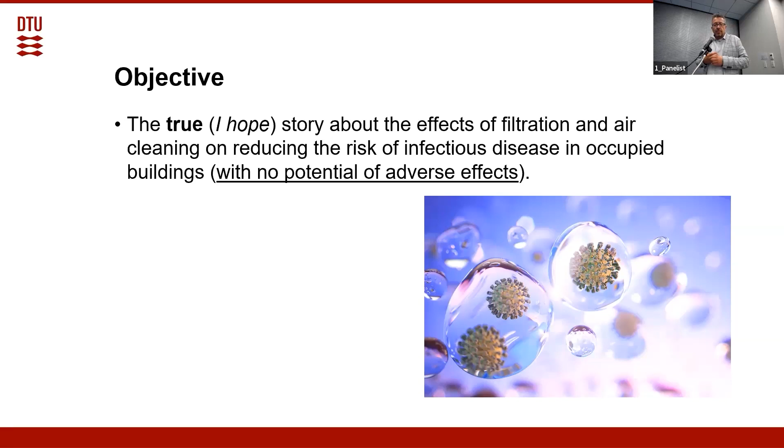But think about the normal consumer at the very end. Mr. or Mrs. Smith is afraid of COVID and they want to buy an air cleaner and they really don't know what to do. So my objective today is to tell the true story, I hope true, we can discuss afterwards, about the effects of filtration and air cleaning on reducing the risk of infectious disease in occupied buildings, with no potential of adverse effects. So I will be looking at different types of air cleaners that may or may not create potential adverse effects on people.

So let's start with the introduction. During the pandemic, there have been several recommendations regarding air cleaning, and these two are probably the most known. One is by the ASHRAE Epidemic Task Force core recommendations, which say under point 2 that besides providing ventilation, you should use combinations of filters and air cleaners that achieve at least MERV 13 or better levels of performance for air recirculated by HVAC systems. They also say only use air cleaners for which evidence of effectiveness and safety is clear.

And then the Lancet COVID-19 Commission Task Force also published recommendations, four of them, and two related to air cleaning. One was a repetition of the ASHRAE Epidemic Task Force: upgrade air filters to minimum efficiency reporting value MERV 13, and then supplement those with portable air cleaners where needed. So these were basically the recommendations.

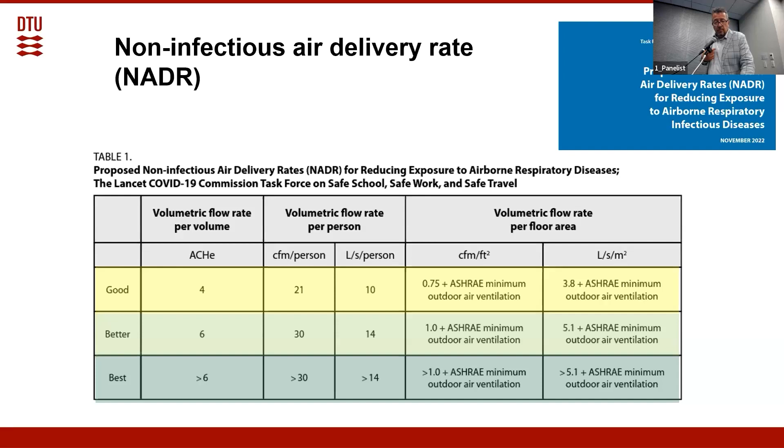And recently, last week on May 12th, ASHRAE published for review ASHRAE Standard 241, in which those equivalent clean air delivery rates were proposed. At the same time, CDC published recommendations for 5 air changes per hour. I'm talking about filtration, but it is very important to have that reference because these are the target levels of dilution that you need to obtain.

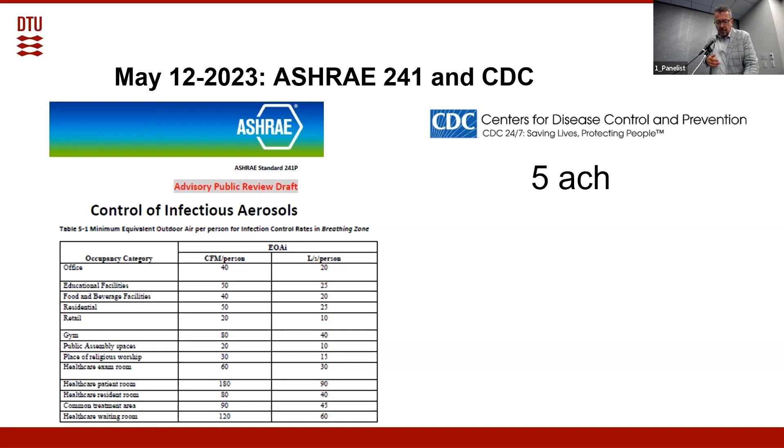So if we think about those target levels, we have to remember that those target levels refer to the aerosol transmission in long range. So what we are talking about is a long range, not the short range. So it's a far field, not a close field. And these are the aerosol transmission. So if we talk about 5 air changes per hour, we're talking about reducing the risk of aerosol transmission in the far field.

This dilution will reduce the concentration of aerosol in a short range or a close field, but we really don't know and cannot estimate whether that will have any effect on reducing the risk. It will also depend on the air distribution in space and so on. Because basically, in a space, the loss rate of the virus or aerosol that contains the pathogen will be obtained by generally 3 methods: by dilution, that occurs by the outdoor air, by natural virus inactivation, Chris was talking about it, I just repeated, and the deposition.

So this 5 or 6 air changes per hour is basically additional to other loss rates, such as deposition or natural inactivation. And instead of using only outdoor air, because we are talking about aerosol, what we can do is replace part of the outdoor air with air cleaning methods. That will reduce the level of aerosols, so dilute them, or remove them from the space, or inactivate the virus. And this inactivation level would be corresponding to certain loss rate of the virus in the space.

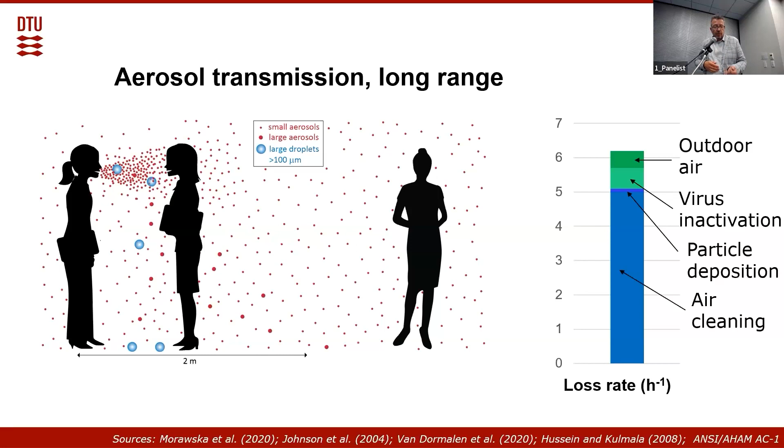So this is why air cleaners are important in that sense, because we are talking about the pathogen and aerosols. And removing it or reducing the risk does not necessarily require only outdoor air to be used for that purpose. So to repeat, what the air cleaner does is increase the dilution rate. So it's an additional loss rate or dilution removal element in a space.

So if we have a mass balance model, we have an emission side, and then we have a dilution or removal side. When we have an air cleaner in a space or in a recirculation duct, we will have an additional term, and this additional term is on the dilution part. So this is the general theory. And of course, increasing loss rate, as is seen on the right figure, will reduce the probability of infection. So if we can document that the air cleaner is contributing to the loss rate of the virus, we will then reduce the probability of infection.

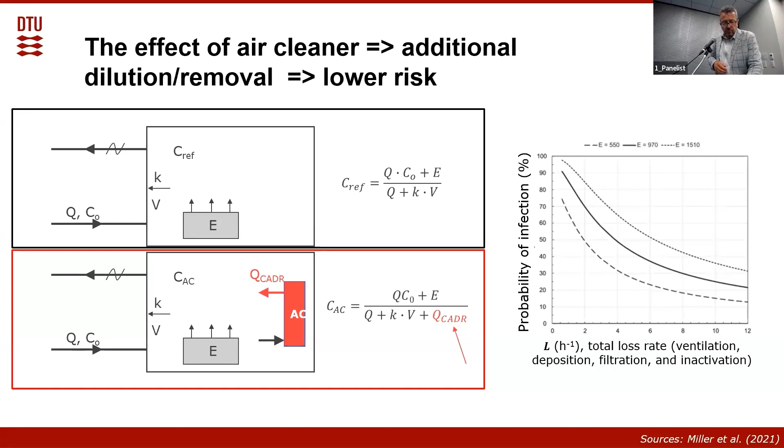If we speak about air cleaning technologies in connection to infection control and controlling the risk of infection, we can talk about two types of air cleaning technologies. One, technologies that I would call subtractive technologies, that remove the virus from the space, and then other technologies that I would call additive technologies, that add some constituents to the space to remove the aerosol or inactivate the virus in a space. So basically subtractive and additive.

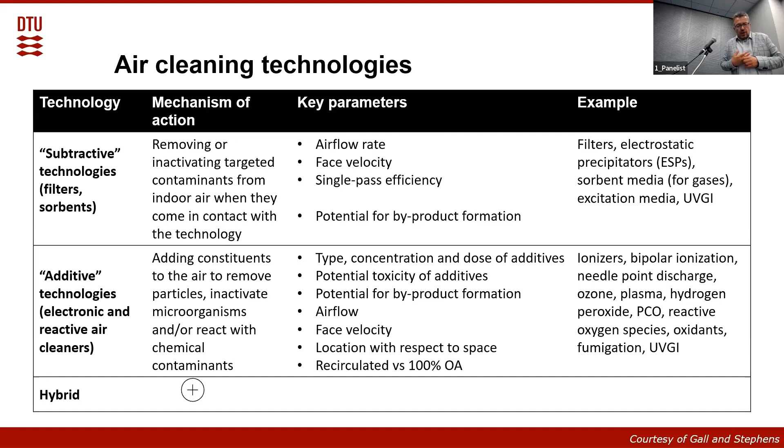As examples of subtractive technology, we can have filters, particle filters, electrostatic precipitators, sorbents. From time to time, UVGI or UVC is also considered that, although I would rather call it an additive technology. And additive technologies would be the technologies that use ionizers, bipolar ionization, needle point discharge, ozone, plasma, hydrogen peroxide. They add an element to the air in order to achieve the air cleaning effect.

For the subtractive technologies, which is filters and sorbents, there is a good deal of standards that define their efficiency. Particularly for particle filters, we can estimate their efficiency, there is a good deal of standards to which we can refer, and we can test how effective they are. We also have some standards regarding sorbents, but basically these are standards that refer to the material that is used in the sorbent. Also, we have standards for the UVGI.

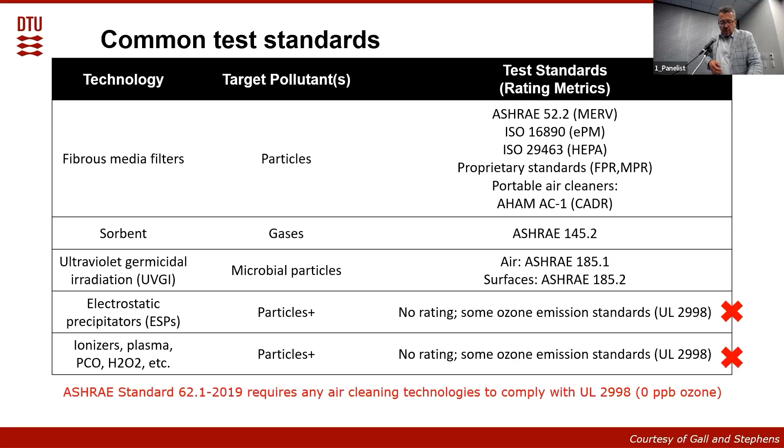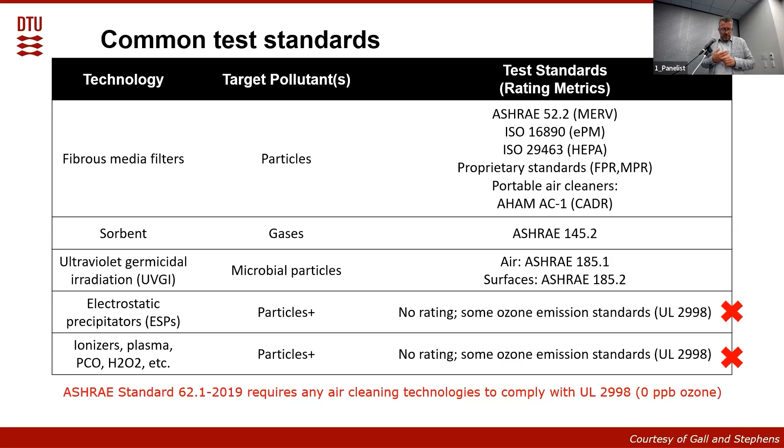However, we have less information about other types of technologies and other standards, and particularly that applies to ionizers, plasma, and so on. There are no standards which we can use and refer to, and there's no rating. And some of them emit ozone, and basically we can refer to UL 2998, which defines that air technologies, according to 62.1, should comply with that. So they should actually emit 0 ppb ozone if we follow that recommendation of Standard 62.1.

There are other recommendations, though, regarding air cleaners. Although there are no standards, there are certain position documents and recommendations, and our epidemic task force also had it as a recommendation: what type of air cleaning technologies can be used, and if they are used, what procedures they should comply with. These are the two positions from the position document on filtration and air cleaning published by ASHRAE in 2015, and the new version will be coming later this year or early next year. Those two specific positions will be retained in the new version.

So if we think about air cleaners in connection with infection control, we should remember that all filtration and air cleaning technologies should be accompanied by data documenting their performance regarding removal of contaminants, established on industry test standards. Very often these are not available for some of the technologies I mentioned, so there must be scientifically controlled third-party evaluation and documentation that they are working. They cannot just be claims; they should be documented. But even this documentation may have problems; I'll come back to this in a moment. And devices that use reactivity of ozone for the purpose of cleaning the air should not be used in occupied spaces.

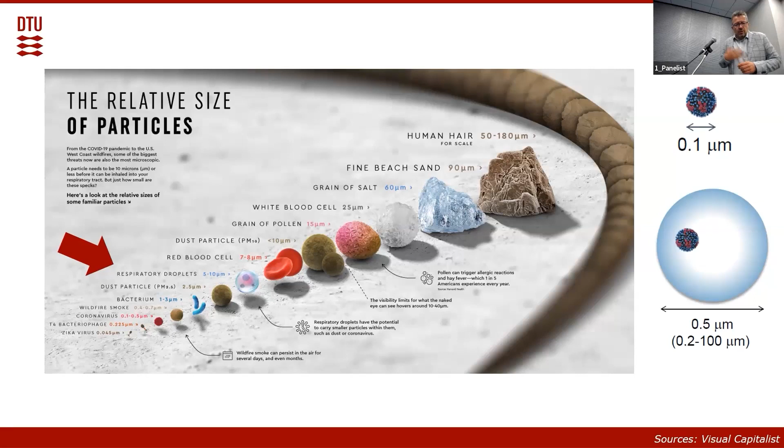So let's start with air filtration. There's not much to say. Every one of us knows the virus has a certain size, the droplet has a certain size, and we are talking about respiratory droplets, which are 5 to 10 micrometers and lower. So filtration will be a very effective method of removing those aerosols from the air. The recommendation given is MERV 13, because for MERV 13, most of the droplets or aerosols in the size of 5 micrometers will be removed. The best recommendation would be HEPA filtration, which removes most particles from the air, but that is costly and requires specific solutions, because HEPA filters create very high resistance. But generally, MERV 13 filters would be very effective.

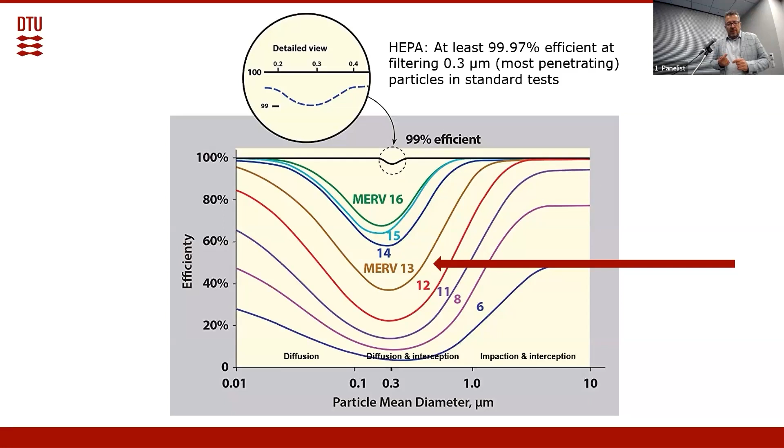And then you can think: can we only use MERV 13 filters? Basically, the ASHRAE recommendation for MERV 13, for example, can be obtained by combining filters. Combining filters with a lower efficiency will end up with an efficiency of MERV 13. And these are a few examples of how you can achieve that, calculated for the example.

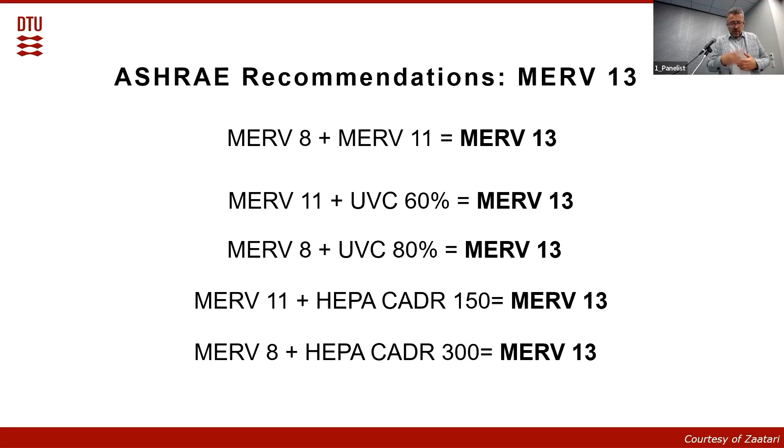During the pandemic, portable air cleaners became very popular, and so-called do-it-yourself portable air cleaners were very much recommended, especially the Corsi-Rosenthal box, where you can build your filter and put it in the space where there is a potentially increased risk of infection. However, we have no field evidence that it would work. We have only evidence from modeling. So we recommend use of those filters, and they are used, but we have no field data showing they would be effective. We can expect it is effective, but we cannot validate it. This does not mean they are not effective, but what we're really missing in the chain of all these recommendations is the actual validation, and this validation does not exist.

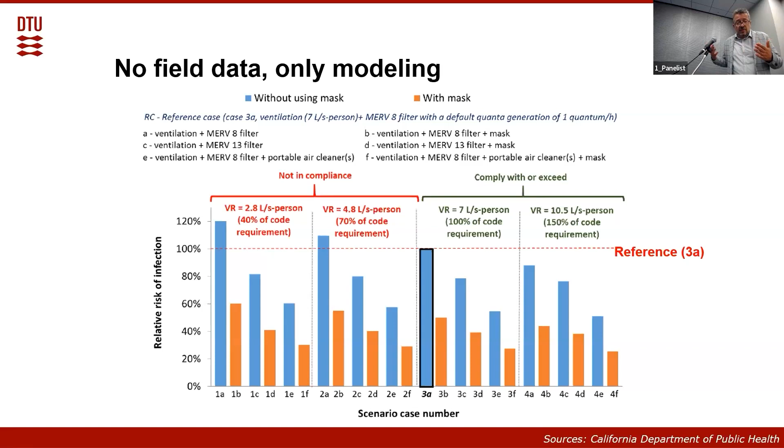This is an example of modeling. We have mainly modeling data, and this modeling data also has many limitations. I don't want to discuss those limitations, but this is one of the first modeling studies published at the outset of the pandemic, in which the effects of improved filtration, looking only at without mask, were modeled using the Wells-Riley model. This is a relative risk of infection change, not absolute, relative to the reference case 3A, which is ventilation of 7 liters per second per person with MERV 8, the classical system designed after 62.1. So here we see a very strong effect of filtration through modeling, but we don't have that evidence from actual measurements in spaces. The only field validation that we have today was published last year.

This is a study of schools in the Marche region. There's also a lot of debate about this study, but if we are talking about field validation, it's probably the only study that measured the incidence rates in classrooms of pupils after intervention. The intervention was installation of improved ventilation, mechanical ventilation systems, in 300 classrooms. Then they measured incidence rates in those classrooms and compared them with 3,000, I think, classrooms in which no mechanical ventilation was used.

From this study, they proposed a ventilation rate of 14 liters per second per person, between 10 and 14 liters per second per person, to be used. I don't know how it would be comparable with air changes per hour, but this is more or less the rate that was proposed by Billings in the 19th century when there was increased incidence of tuberculosis, and that was also presented in the first presentation in the session today.

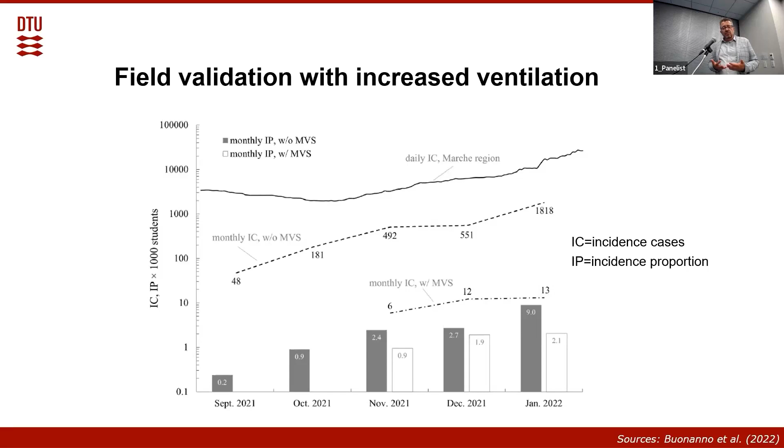So we really don't know against which number we need to compare. We really don't know whether 14 liters per second is enough, or 15, 20, 30, 50, and so on. The numbers that we see are from models based on certain assumptions. And again, I want to repeat, this does not dismiss this data. It only creates the situation that we must validate this. So basically, we have to make certain investments and test this. Otherwise, we will have debate all the time whether this is correct or not. Anyway, I want to continue.

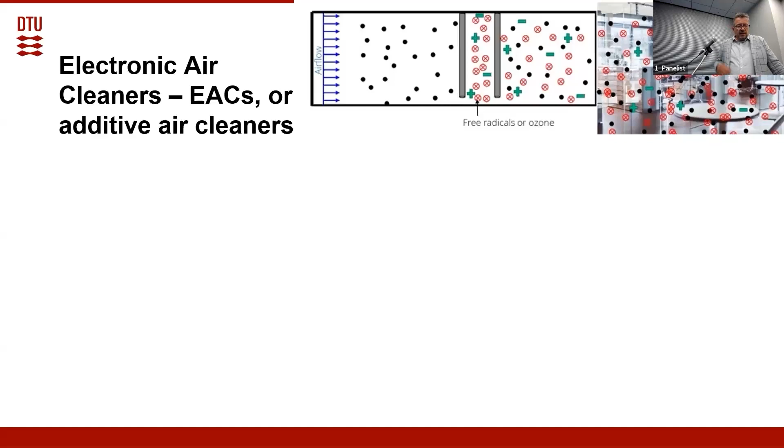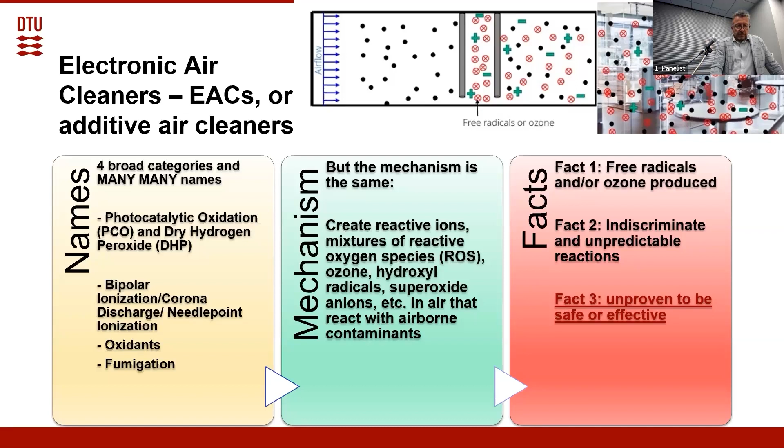So there are other types of air cleaners, and these are basically additive air cleaners. I want to discuss more about this. They have different names, but they have similar mechanisms. They create reactive ions, reactive oxygen species, or ozone, and add them to the air, and then free radicals or ozone cause the virus to be inactivated or killed, basically. And we do not know what reactions are happening. We know that the virus is killed, but there are many other things happening, and some of those effects may be unproven, or we don't know whether they are even safe, because we don't have any reference to which we can compare.

UV and GUV were discussed, so there are certain challenges that I want to discuss in the last 5 minutes, which are the most important parts of this presentation. First is the efficiency of air cleaners, then the production of reactive species and chemical transformations occurring in the space, and noise with respect to the clean air delivery rate and efficiency. There are also other aspects I won't have time for: commissioning, maintenance, operation, monitoring, documentation, air distribution in a space, and replacement of filters. If the system is designed for MERV 8 and you put MERV 13, you will probably need to rebalance your system because the MERV 13 filter may be bypassed. And if you put HEPA, there may also be bypass. There is also an energy aspect, which I will talk about at the end.

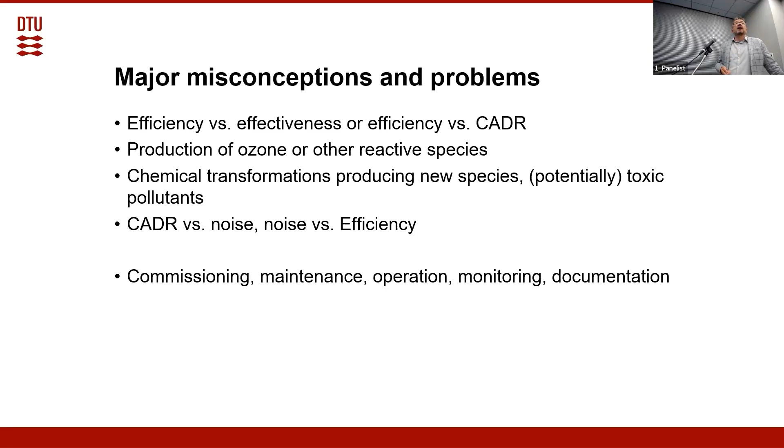So let's start first with the clean air delivery rate. Often the producers of air cleaners provide us with the efficiency. They test the air cleaner and say that they have 99.99% removal of whatever specimen they test; here we would talk about pathogens. It depends on the chamber in which this data was obtained. This is the methodology used: it's tested in different sizes of chambers, which correspond to different clean air delivery rates.

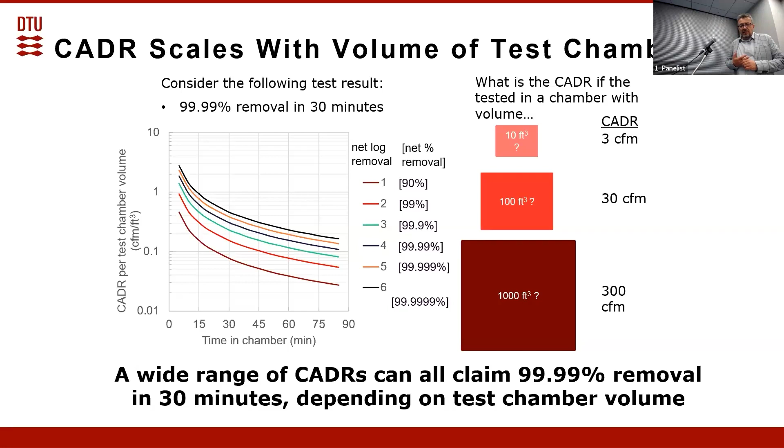So if this is a chamber of 10, sorry for the units, 10 cubic feet, then the clean air delivery rate will be 3 CFM, which is 1.5 liters per second. If it is 100, it will be 15 liters per second, or 1,000, it will be 150. And this is what is important. Important is not the efficiency, but the clean air delivery rate. There is a wide range of clean air delivery rates that can all claim 99.99% removal. So it doesn't mean that it will be effective when installed.

So let's take an example. If we test the air cleaner and it has a 98% removal in 60 minutes in a chamber of, let's say, 14 cubic meters, the effect size will be around 2 air changes per hour. But if we scale it up to a normal classroom, then the effect will be only 0.31 air changes per

hour clean air delivery rate, which would mean that to get 5 air changes, which is recommended by CDC now and also by the Lancet Commission, you'll have to have 16 units in a classroom. So 1 unit will not be enough; you have to have 16 units in a classroom.

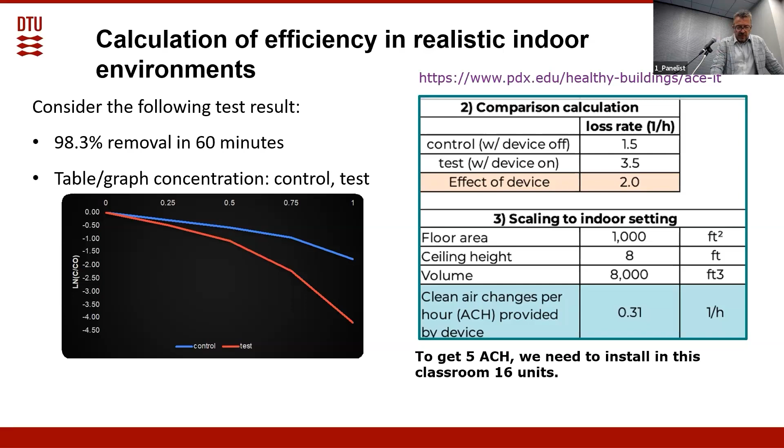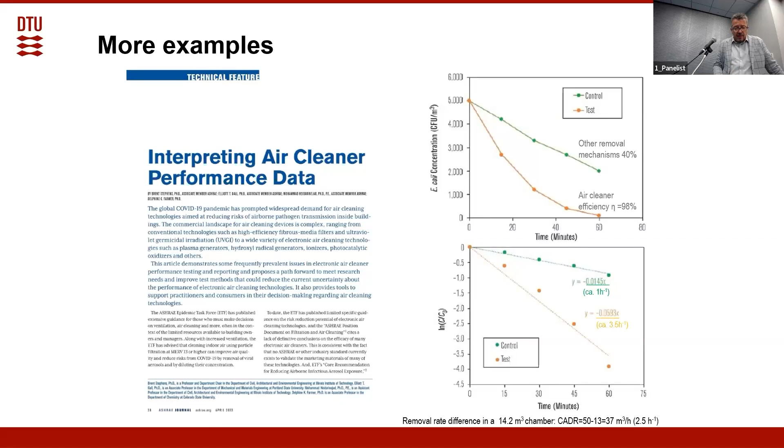More about this you can read in the very nice paper that was published in ASHRAE Journal, which is actually discussing how to interpret this air cleaner data. The study was made by Stephens and others, and it can be obtained from ASHRAE.

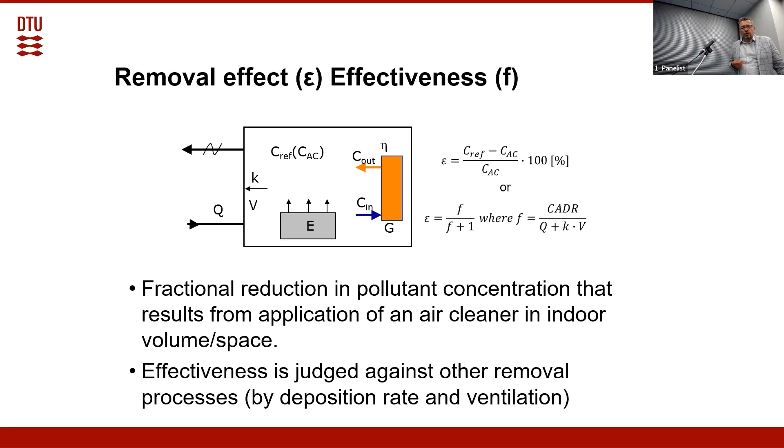And effectiveness is a term that is actually telling us how effective the air cleaner is in comparison to other methods of removal. And if you have efficiency of 99%, but very low clean air delivery rate, the effectiveness will be very, very low. So basically, there will be no point in using the air cleaner.

Yeah, I will quickly. Okay, how much time did I have actually?

Okay, sorry. So now very quickly, ozone. There are data on ozone that are presented, and the thresholds for ozone suggested by the standards are 50 or 20 ppb. The presence of ozone will cause incomplete oxidation of many compounds, and then new compounds will be produced, so ozone production in the process of killing or deactivating the virus may produce some toxic pollutants.

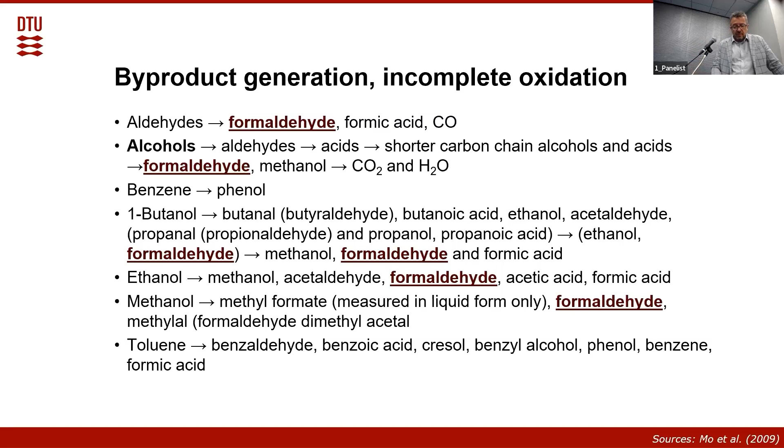There are new papers that show that even UVC may produce excessive levels of particles in the space. And then there is also a new paper published recently on the toxic pollutants that are produced as gaseous secondary air pollutants through the reactions with ozone.

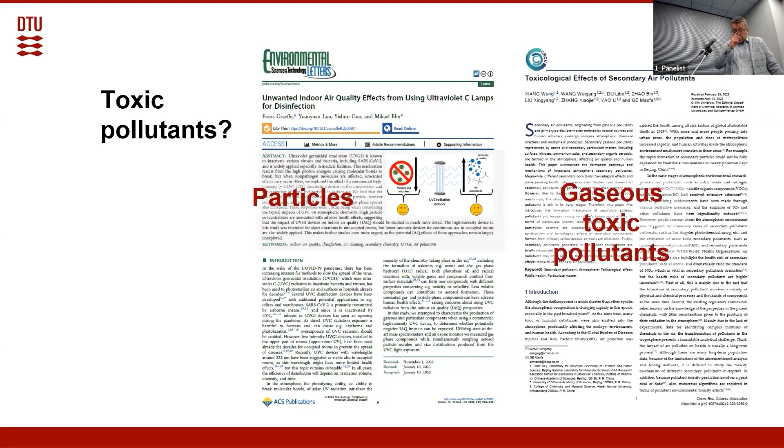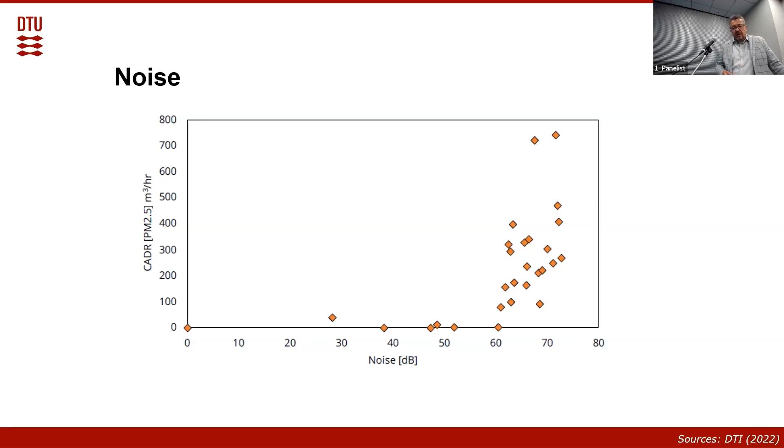Then there is the point of noise, if you have portable air cleaners. Here you see a test that was done in Denmark on 27 portable air cleaners that looked at the effect of the air cleaner in terms of clean air delivery rate and noise. So I come back to the example of air cleaners in a classroom, and most of them will have to run at a noise level of 60, 70 dBA to have any effect. So that is another problem.

I'll skip this. So I will just go to the take-home messages. This is a strong personal bias. So, air cleaning as a measure to reduce infection rate. We should use outdoor air, yes and no, because sometimes the outdoor air may be polluted. And air cleaning and filtration should be used to reduce infection risk, yes or no also. So some technologies are useful and some are not.

MERV 13 and higher should be used. Portable air cleaners with HEPA, probably yes, but we have to remember about the noise. The new evidence of secondary aerosols produced by UVC has to be tested further, but probably yes, because this technology, UVGI, has been used. Additive technologies and reactive species, probably no, because of the negative consequences that they may bring.

And then the problem is that we have a lack of proper testing methods and a lack of verification in actual applications, and we have to weigh risks. So maybe some of the technologies, even though they may produce some toxic pollutants, the levels may be very, very low compared to the positive effect that they produce during a pandemic. So we don't know about this. So thank you. Sorry.